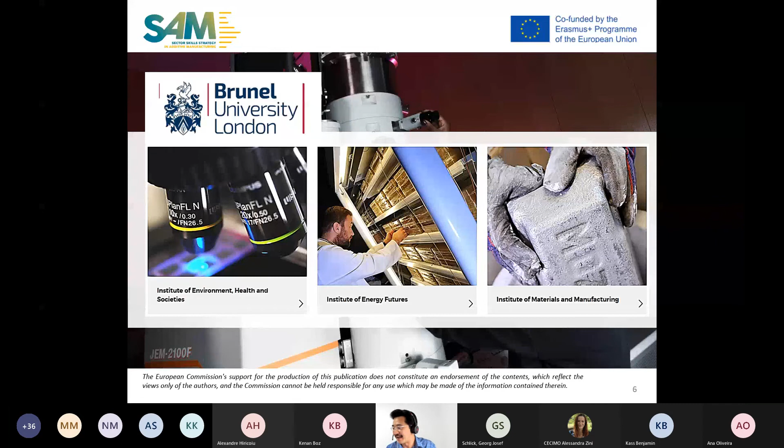We have a couple of projects in here, and there is a website link, brunel.ac.uk/research and /projects. You see the list of projects, some ongoing, some completed, some are EU projects, some national, some international, commercial, etc. So just feel free to have a look when you've got time, and very much happy to be engaged with you for those projects.

So giving you a little bit more background about myself, I've got a research focus on design for additive manufacturing, as well as on 4D printing. I know today's talk is about 3D thinking, but I've got a little bit of research also in the area of 4D printing, which is quite novel and really emerging. It takes a step further by using smart materials for 4D printing.

In my day-to-day job, I work in Brunel University as director for postgraduate research, as well as leading the product design engineering programs in the university.

I'm involved in standardization. So in terms of standardization, I'm the convener, or call it a chair, for ISO TC261 Working Group 4, which is for data and design at ISO level, as well as chair for the British Standards Institute for BSI AMT8 for additive manufacturing.

I'm also a chartered engineer and a chartered technological product designer. Also the editor-in-chief for the PIM journal, which is from Springer Nature. So that gives you a little bit background about me, about what I do at the moment.

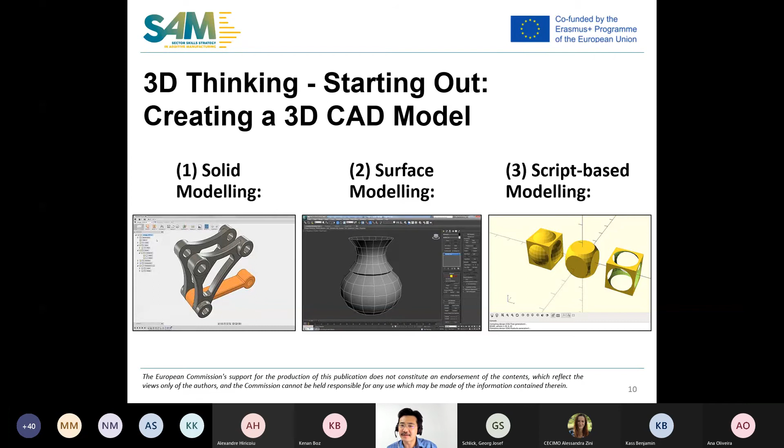Each of these obviously involves different use of software, different approaches - solid modeling approaches, surface modeling approaches where you can pinch and pull that surface, or using programming scripts for the last one. Once you have got that process, once you've got a 3D CAD model that's created, you have to save the file, which means you kick off with that digital flow, that digital chain process.

From the CAD model, you would have to slice it, to make sure that each layer being generated is also in a file format, like STL or AMF. Other file formats include 3MF, OBJ, IGES in the slicing process, where you input the machine parameters, and then you have the toolpath, which produces the G-code for the machine to read, kicking off the additive manufacturing print process.

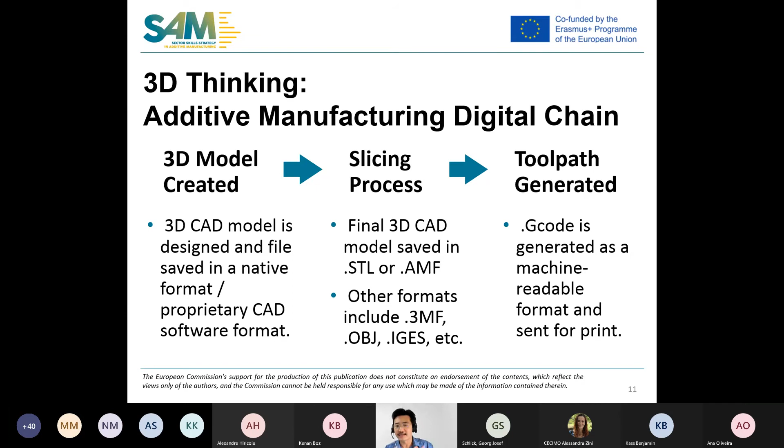So this would be the digital chain, but really the 3D model is where your 3D thinking process has a lot of a domino effect in the whole process chain. So it's very important to think about design for additive manufacturing.

We're talking about design for additive manufacturing. It's a very wide topic, and usually it's linked to the use and understanding of design rules, design methods, or tools. Tools could be software, or flowcharts and things like that, to ensure you achieve the functional performance and product considerations in terms of manufacturability, reliability, and cost using additive manufacturing processes.

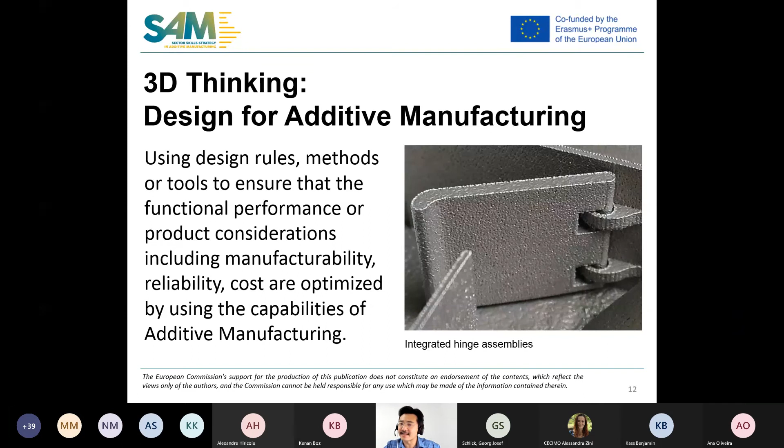You can see in this image, design for additive manufacturing could be integrated hinge assemblies. You manufacture that component in this photograph in one process. You don't have to assemble it, put it onto the production line, or get somebody to install that hinge. It's an integrated, one-stop process, which helps you take advantage of additive manufacturing.

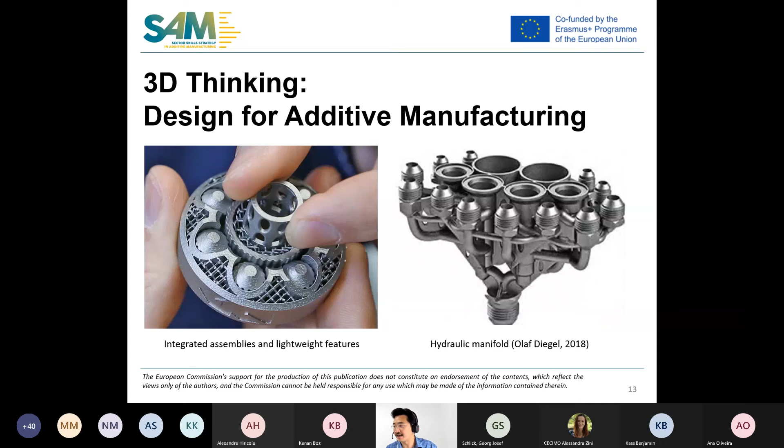Design for additive manufacturing could also take into consideration support structures, because of the interesting process where parts that are less than 45 degrees tend to drop. You need to have support mechanisms, either support structures supporting that. But if you design it so the angle is not less than 45 degrees, you may need to think about the design considerations.

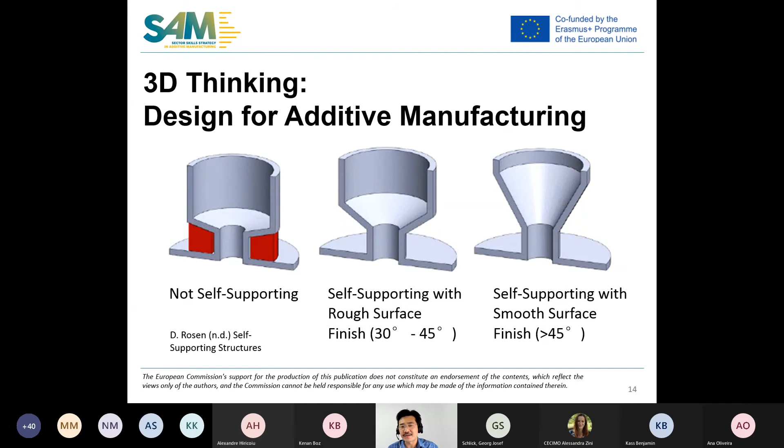So think about the angle, and that's really about design for additive manufacturing, because if the angle is lower than 45 degrees you need supports, and those supports have to be removed, which means an extra step, and that's where material is also wasted. So 3D thinking is also interestingly linked to the process itself for additive manufacturing.

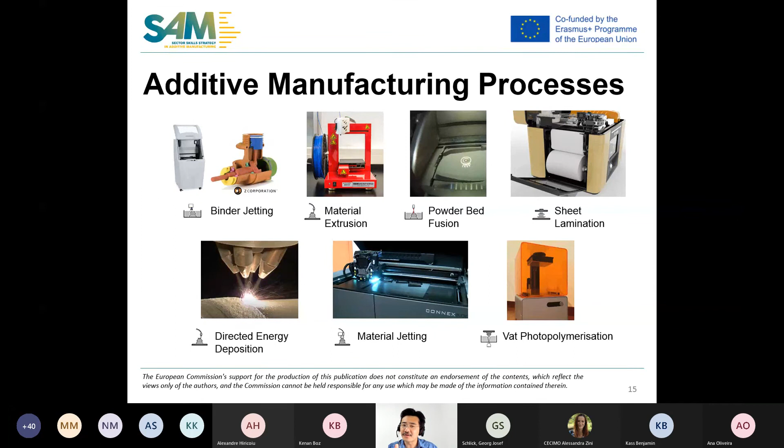We know that additive manufacturing involves 7 different types of manufacturing processes. Each may require you to think about being creative, also about the types of material being used. I've got a little bit of time with you today, so I want to go a little bit quicker, mindful of time.

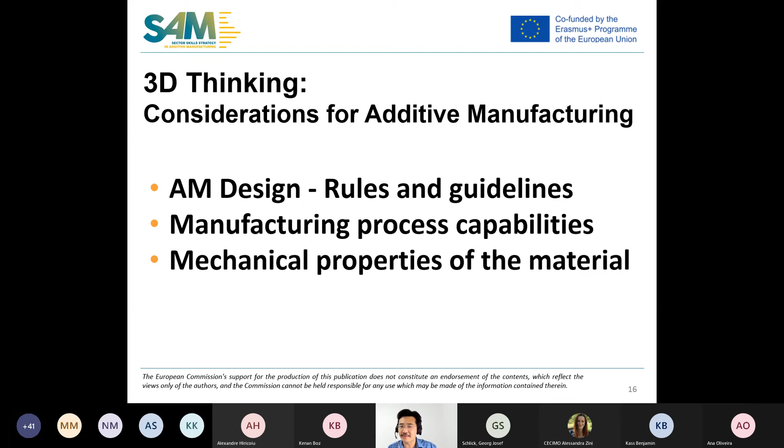In terms of 3D thinking considerations for additive manufacturing, I break it down into 3 areas: rules and guidelines for additive manufacturing, process capabilities, and the type of material choice in relation to the functional properties you need to achieve.

Let's look at the first one, design rules and guidelines. You can see that design rules and guidelines will also be linked to general rules and process-specific rules. Let's touch on that shortly.

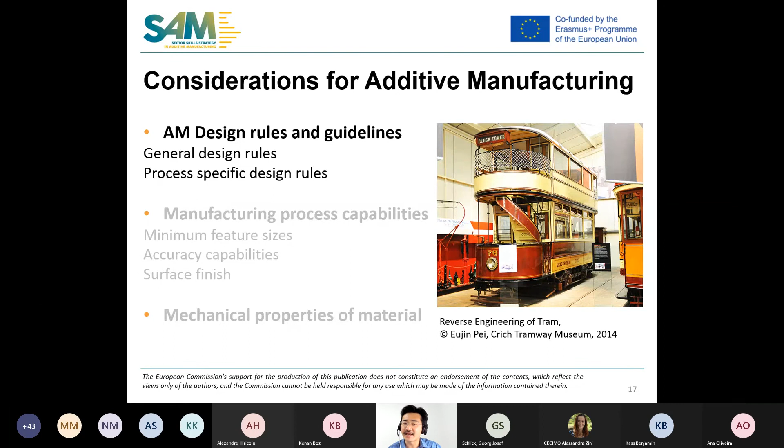To give you an example, on the right-hand side you can see this beautiful historical tram. This was a project we did together with the Crich Tramway Museum back in 2014, about 11 years ago. Back then, the tram museum wanted us to completely reverse engineer that tram because in the 1920s they only had technical blueprints. They didn't use any CAD software, and we had to reverse engineer that.

To reverse engineer an actual tram into a CAD model involves a bit of thinking, because they wanted us to actually 3D print that tram later on.

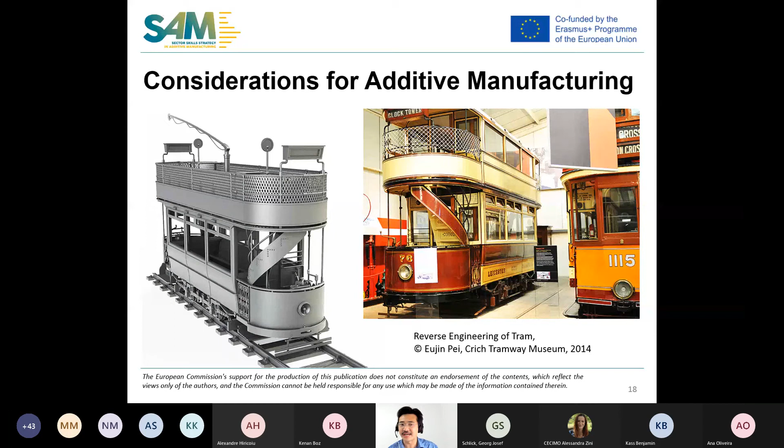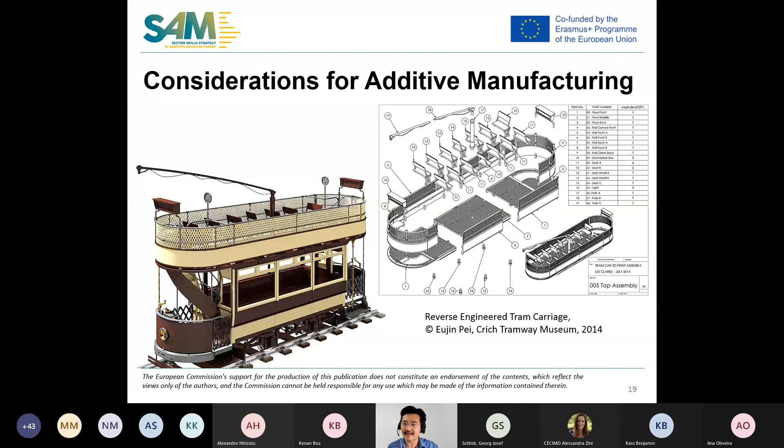So you could see on the left hand side, we've actually modeled that from scratch. We had to visit the museum multiple times, and this project took us about 2 years to complete. Later on, you realize that when it comes to additive manufacturing, you have to think about the build size of the machine. Here we used vat photopolymerization, which is SLA, and the machine was only that small, so we had to break it up into different parts and remodel it. But bearing in mind some parts will be very thin, you might have to intentionally make it thicker, otherwise it would be too fine to print. A second example is about process-specific capabilities in terms of minimum feature sizes, accuracy, and surface finish, which depend on the additive manufacturing process you're thinking about.

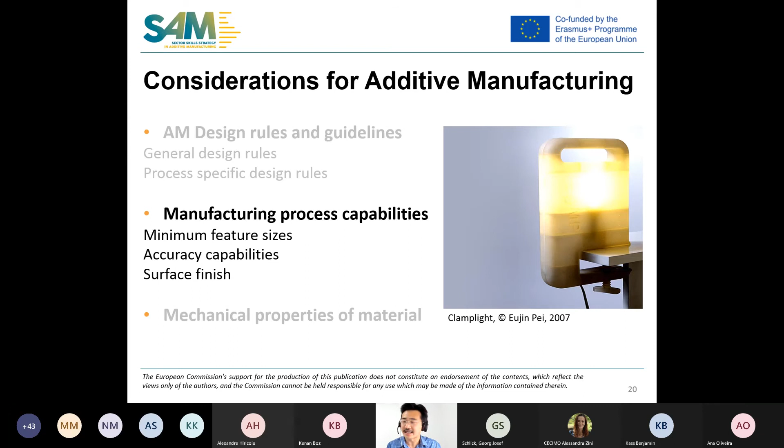Another project to share is the Clamplight, which we did in 2007. This project has different types of features. It's essentially a lamp with a clamping mechanism at the bottom for you to attach onto any work table. When we designed this Clamplight system, we only had 3 components: the main body, which has a living hinge in the center for you to fold and clip it, with snap fits as one main component; the second is the lamp itself, which is a compact fluorescent light; and the last is the clamping mechanism, the third part. So only 3 parts designed for additive manufacturing.

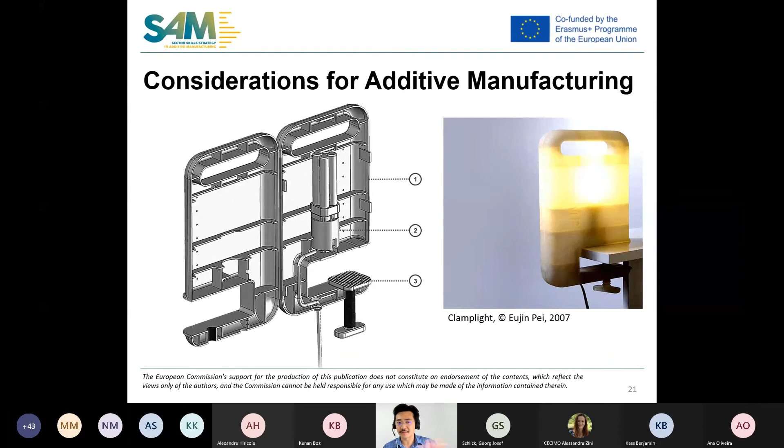But the considerations come in with the structural ribs to give it structural strength. You also need to think about the internal details, which give you the surface smoothness where the parts are manufactured from bottom up. You want the top parts, the outside, to be smooth and without removing support structures from the top, so that you get a very smooth outside surface finish.

Kenan, if I'm a little bit out of time, just let me know, but I've got a couple more slides. Okay.

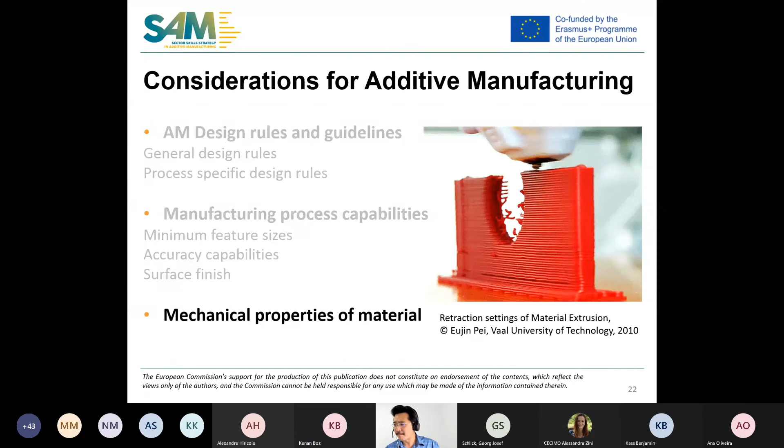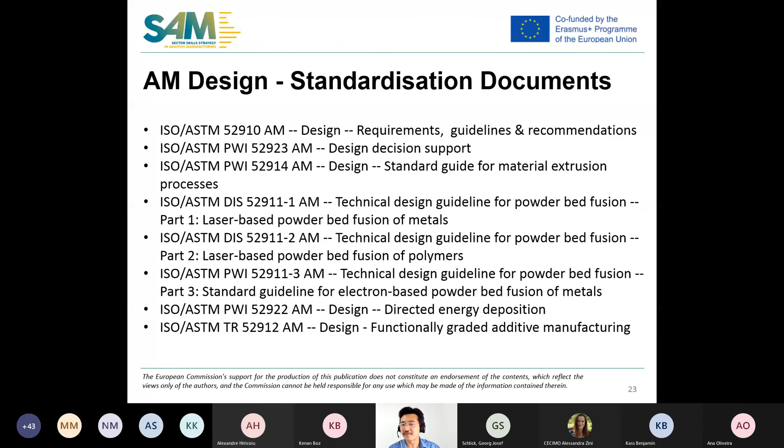It talks about design itself. You could see some of those standard documents about design decision support, design for processes, for example powder bed fusion, for material extrusion, design guidelines for directed energy deposition, for functionally graded additive manufacturing. There's a huge amount of resources out there for standards. We'll touch on just 2 very briefly.

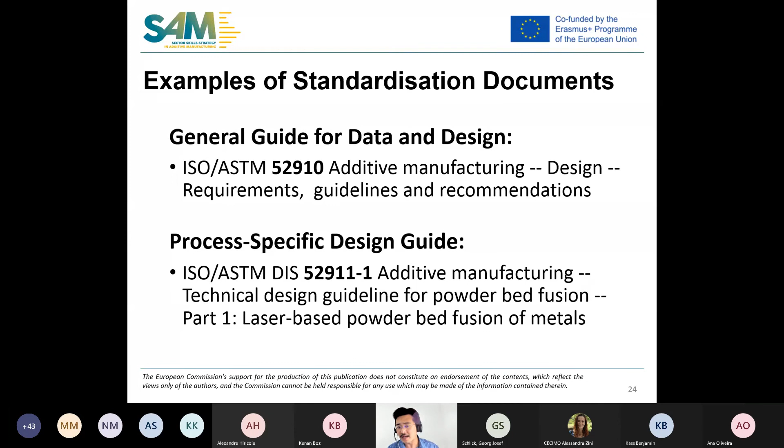The first one is about requirements, guidelines, and recommendations, 52910, and the second is specifically a process-specific design guide, 52911-1, part 1, which is for metals. There is part 2 for polymers, but we don't have time today.

Let's look at 52910, which gives you an overview, and this is a highly recommended document that takes into consideration what you have to bear in mind for additive manufacturing. It talks about specific processes and specific considerations. For example, for binder jetting, you need to think about the infiltrant to give you solidity, to make sure the powders are infused together. It also tells you about post-processing treatments, the type of binder, the powder selection. So process by process, it discusses that in 52910.

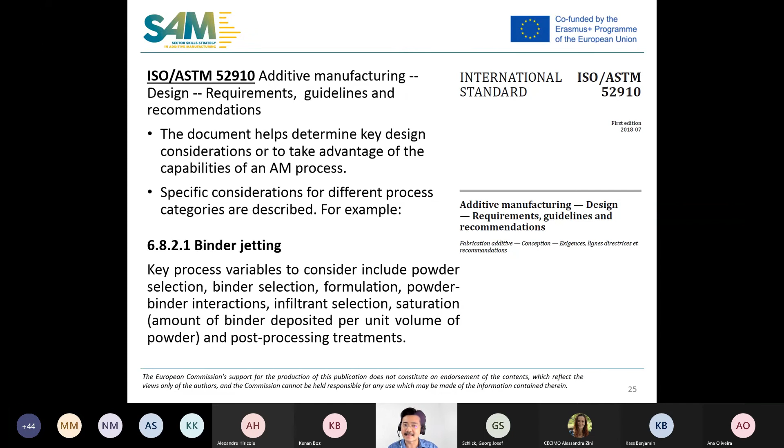It also tells you the advantages of design for additive manufacturing, such as part consolidation from 24 pieces into just one single part. For example, from Olaf Diegel's work, you can see some examples here from 52910 about multi-part mechanisms.

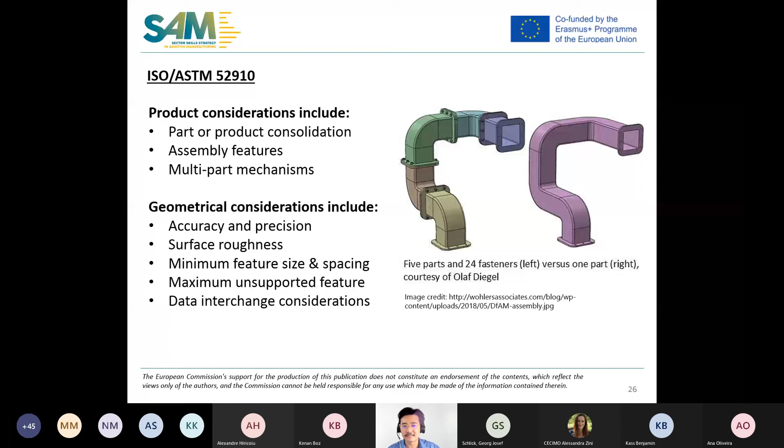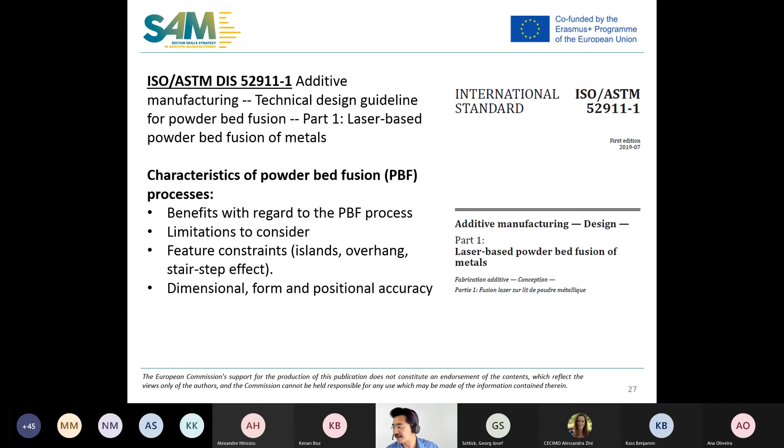And also for 52911-1, which is for laser-based powder bed fusion of metals, it talks about the process itself, the feature constraints, and other considerations. It gives you examples of what to bear in mind if you're planning to use powder bed fusion of metals, or polymers for part 2. It gives recommendations on how you can change the design.

For example, it gives a recommendation that if you have a teardrop-shaped hole, you don't need a support structure because the top part is slightly higher than 45 degrees, whereas if you have a circular feature, you probably need a support structure.

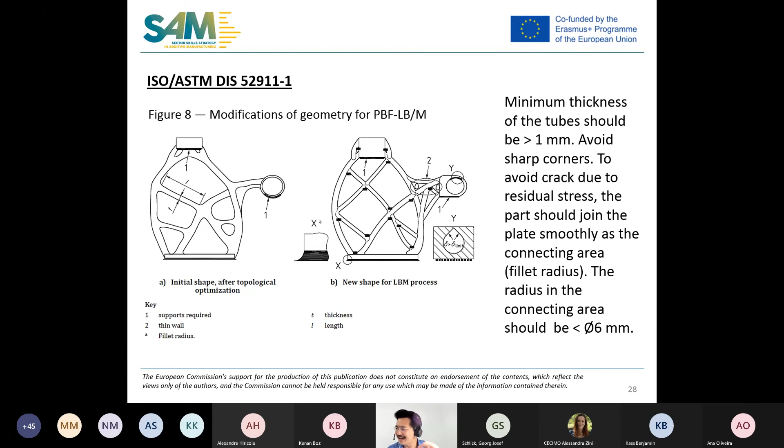But in summary, think about additive manufacturing as a way to support your 3D thinking. Think about the rules and guidelines, think about the machine process or the manufacturing process, and also consider the type of materials that you plan to use when it comes to additive manufacturing.

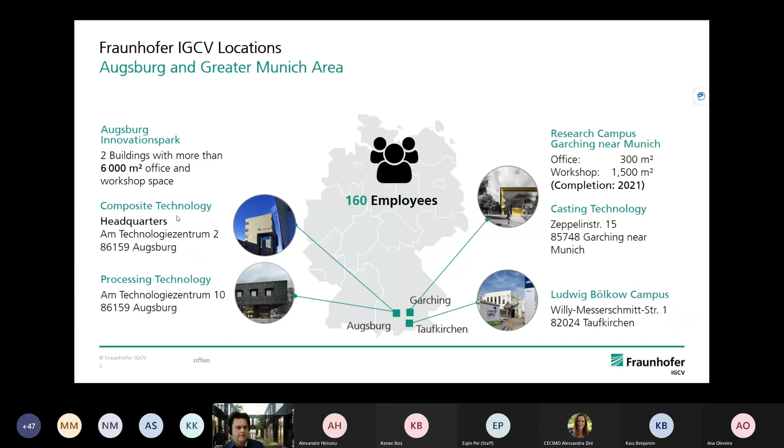So who am I? I'm working at Fraunhofer IGCV, located in southern Germany, Bavaria, in a city named Augsburg. We work in applied science on production engineering. So what is it we are doing?

We work in the areas of engineering, production, and multi-material solutions, along the whole production line. We start with materials engineering, design methods, design, processing technologies, and last but not least, we also organize plants and factory setups. That's where we put our scientific expertise.

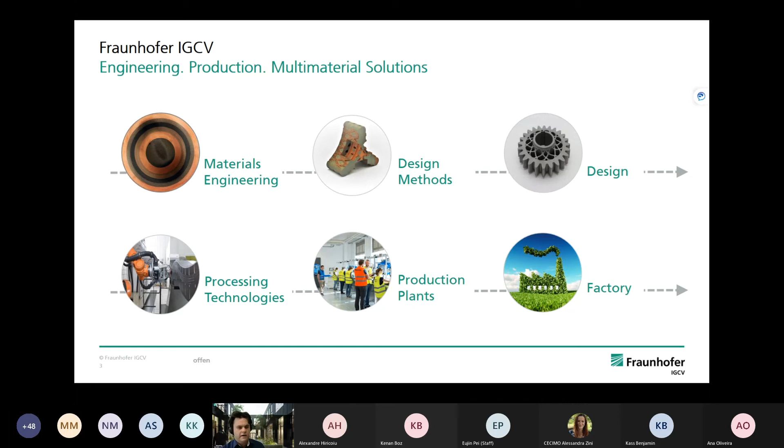In the first part—materials engineering, design methods, design and processing technologies—we're specialized in casting and composites. However, we have a very strong part also in additive manufacturing. In casting, composites, and what we call production engineering, we have three branches or departments working a lot with additive manufacturing.

This starts with additive manufacturing for sands and toolings in casting, and goes over to polymers and composites, especially reinforced composites—3D printing of reinforced composites—which is focused in the department of Professor Iman Taha.

And myself, I'm head of the department where all the metal additive manufacturing is going on at Fraunhofer IGCV. We have three research groups with 16 people all in all working on additive manufacturing of metal and metal multi-materials, combining different metals and combining metals with other materials.

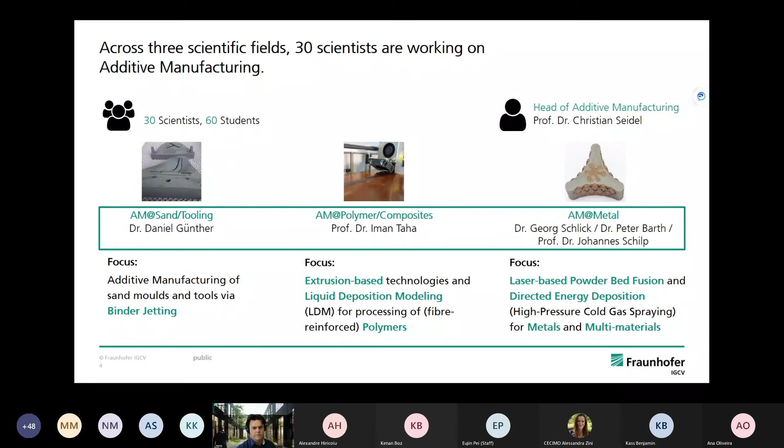So when talking about 3D thinking, I want to start with a more or less straightforward example: optimizing a hydraulic block. This is an example you'll see rather often in literature. We started with a drilled block with a lot of holes, and asked what do we do if we want to optimize a part like this?

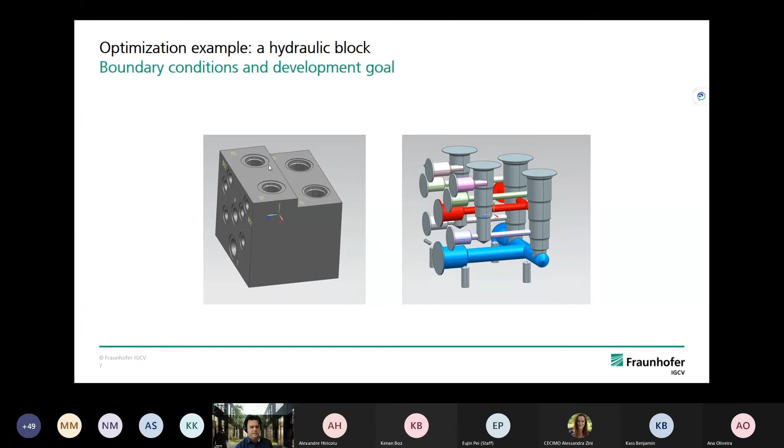We really do know the boundary conditions—where to actually place it toward the next part. So we have all the boundary conditions, and then we go through a rather straightforward optimization loop. We have the pipes, we know where all the interfaces are. We may start with an easy design, and then we need to layer the design thinking for additive manufacturing over it.

So we get something we can actually manufacture. We bring it to the machine and manufacture it. In terms of optimization, these hydraulic blocks are typically low-hanging fruit because you can always save a lot of weight, and you typically get better performance because the joints and all the pipings become much smoother—they don't have these hard cranks around the corners after designing for additive manufacturing.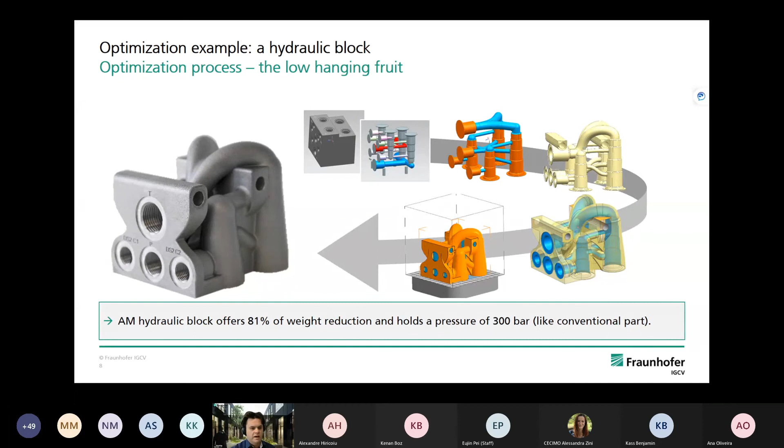But when you need to think a bit more out of the box, it's often very helpful to go along biomimicry. So I brought some analogies from nature, which I'll apply to a rather simple part in the next steps. The idea in biomimicry is always to break down the problem, to see what you actually have to optimize, which properties of the part need to be optimized. Then typically nature gives us a lot of examples where these things are already optimized.

One example is the human bone, which just grows in a way that it can bear a lot of weight and has a lot of strength. But also some algae, and especially some plants like giant water lily, stalks and grasses, and also juncus—all these plants have a certain structure within their leaves and stalks that can bear much more weight and also give some flexibility to the solution.

What I want to say is that often when we talk about optimization, we think in simulation, but for many problems this is not as easy as one would think. It can be really interesting to see what we can come up with when we do product development with these biomimicry solutions. In the next slides, I'll apply this to a rather straightforward solution.

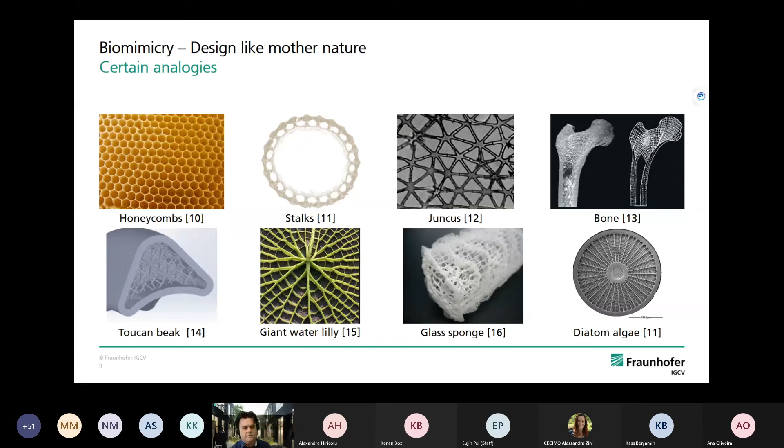However, nature also gives us the opportunity to design for much more properties than typical simulation would handle. Nature does a lot of fluid transport and strength, always combined with flexibility. We also have heat transport and cooling, and this is often not as easy as one would think to combine in one simulation. So the application I brought is actually something rather simple—a gear wheel.

Oh no, it's not that simple, but it's an example everybody knows. In gear wheels, typically there's one part not optimized at all, which is the connection between the teeth and the rod.

This is very hard to manufacture, and it is not easy to know how to place or design this part. So what have we done here? We have taken a stalk, the so-called rough horsetail, which has a certain structure to be structurally strong, and we moved this to a design for a gear wheel. Then we did a simulation for safety factors around 1, and could achieve a mass improvement of approximately 30%.

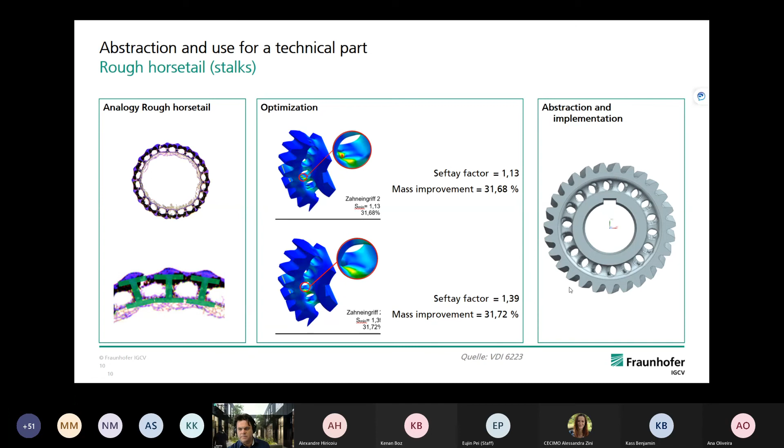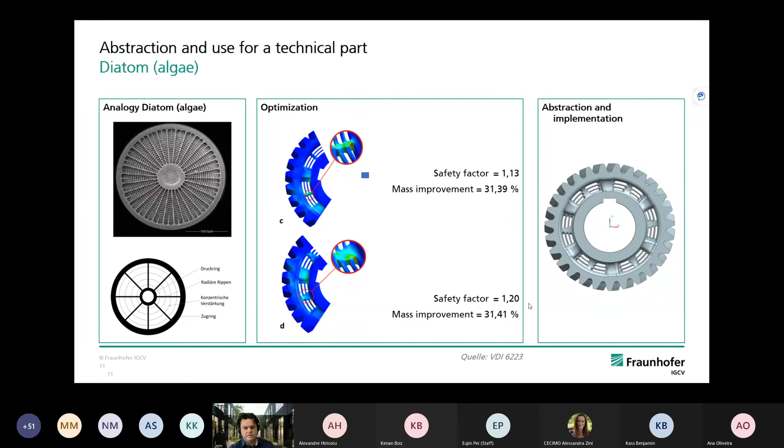Very similar in terms of what we have done, we can also use a structure coming from an algae, the diatom, and we move the same structure to the gear wheel, and we come up with very similar values. We have a safety factor of around 1, so the gear will still hold and be usable very well, as we have already tested. But we will still have mass savings of about 30%.

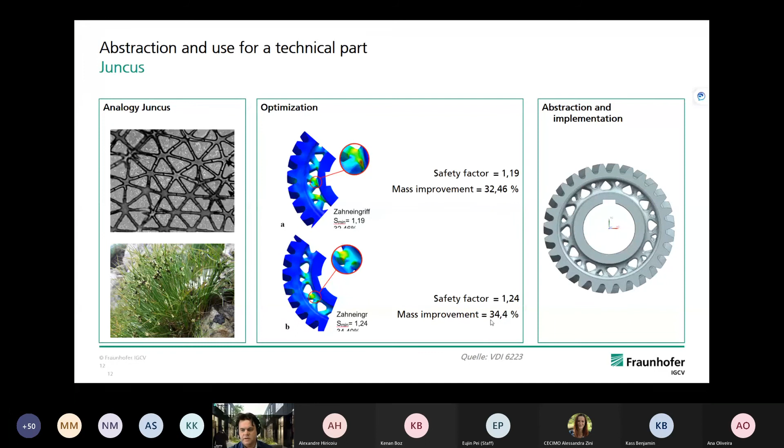And a third design we looked at is the Juncus, which is a plant, and this has a microstructure with a triangular shape. The triangular shape applied to the gear wheel looks like this, and we come up with similar values, getting more or less the highest mass improvements here.

So when we take a short look, we can actually use the analogy from biomimicry to have a major mass improvement in the gear wheel, still keeping a relevant safety factor, and also keeping the displacement in range. This could be the second optimization factor, because this would actually leave us choosing the rough horsetail, which has the lowest displacement for this specific optimization, or we could go for the Juncus, which has the largest mass improvement with similar boundary conditions.

Now, this is an example where we could actually move to a very certain lightweight design using additive manufacturing and 3D thinking. What I've not shown here, but what we could also show in the lab, is that we are getting very close to regular simulation optimization by this manual approach in this case. So this can be a way to actually think in 3D and open the mind, go out of the box for 3D thinking, getting ideas from biomimicry.

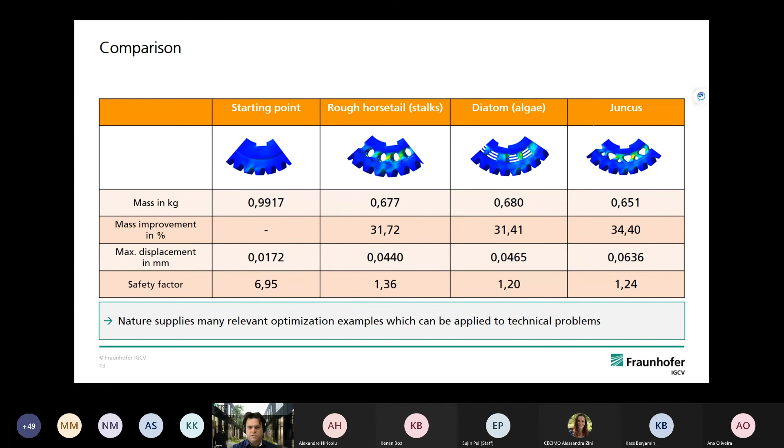Now I kind of want to jump to things that we are working a lot with, because here we see that this can open a vast new way, or vast new opportunities, for 3D additive manufacturing and also 3D thinking. Next step in design freedom from our point of view, or actually research ongoing in this area, is 3D multi-material processing. That's one of my own major research topics.

As you may know, with additive manufacturing it's rather easy to combine two materials in a discrete material transition, especially in one direction. However, what we're achieving, or what the actual research goals are going towards, are continuous material transitions on one hand side, but also 3D multi-material applications in the end.

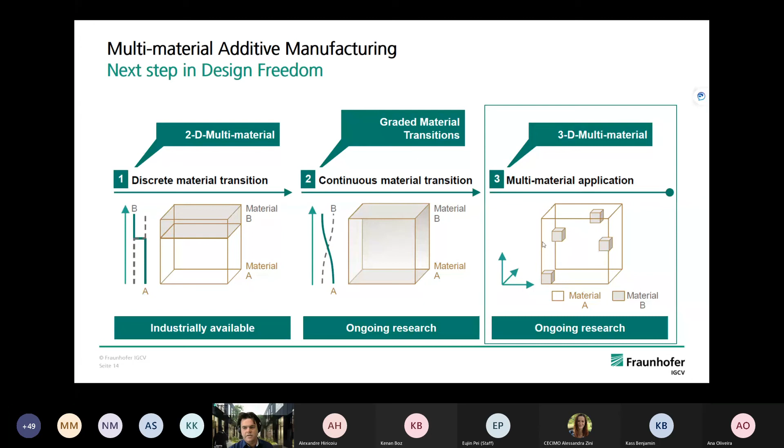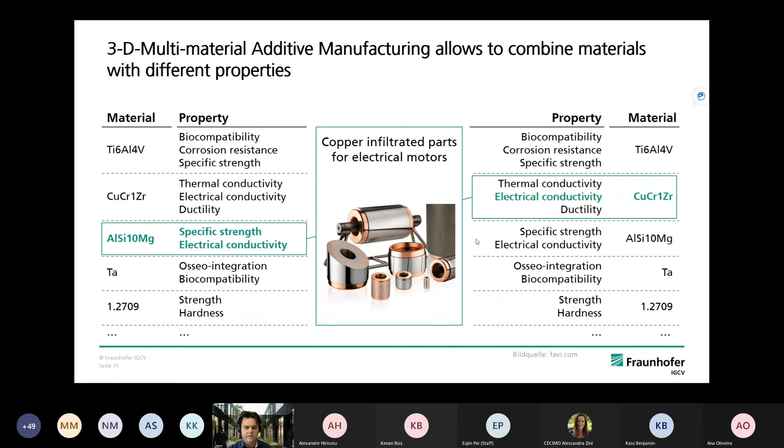And for that, I brought 3 ideas that come from actual industry nowadays, where we have a combination of different materials. This is especially in e-mobility and for electrical motors, where one tries to combine specific strength with high electrical conductivity. This is a conventionally manufactured part from aluminum with copper alloy. However, if we could go towards additive manufacturing, design possibilities will increase much more.

Or let's say a similar idea would be dental implants, where we would like to combine specific strength and biocompatibility with very good osseointegration. So we combine titanium alloy with tantalum, also combining a very good flexible E-modulus, or Young's modulus of tantalum with a very strong titanium.

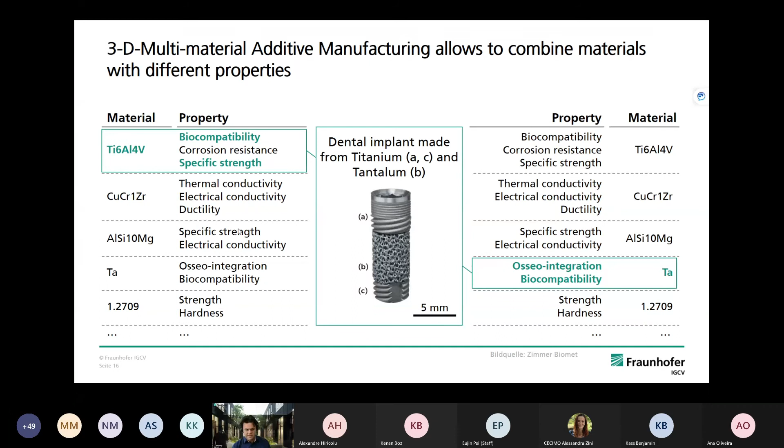And the third part, actually coming from our lab, is where we are going towards die casting tools, where the plan is to increase thermal conductivity without always using, or without losing too much material for cooling channels, and combine this with high strength, high hardness material, in this case a tool steel, to actually also improve functionality in this area.

So in the end, what I try to show you is, on the one hand side, that 3D thinking can be an interesting process, and it is a process that can actually be supported by biomimicry, by looking into nature. On the other hand, we are also technologically going towards one thing that nature does as well: it combines multiple materials in one part, or in one creature, so to say. But for the process of 3D thinking, multi-material processing will actually make these things even more demanding to get the very much optimized part, and to get everything out of your design.

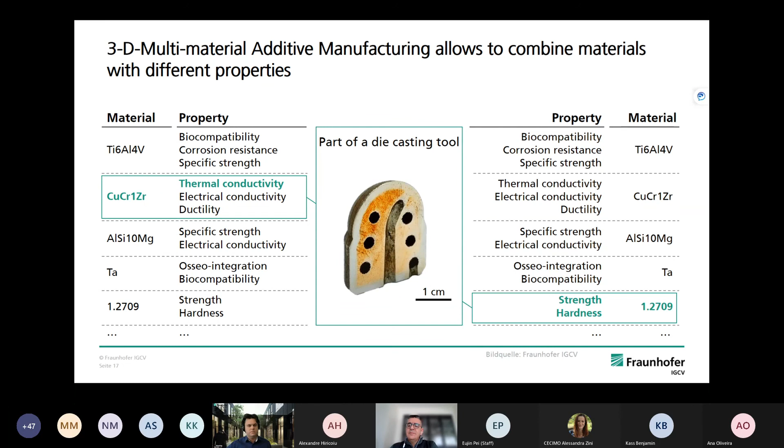Yes, I do think so. When thinking about larger structures especially, this is also an opportunity one could use, or a possible way to achieve similar parts.

Okay, thank you. So the next question is from Daniel. You spoke about the benefits of multi-material printing. Are there any commercially available systems for multi-material printing? Is it available on the market to buy a multi-material printing machine?

Actually, it's becoming available, that's what I would say. Some additive manufacturing equipment manufacturers are offering multi-material processes on a rather experimental basis. However, you can buy one machine by Aconity together with Aerosint, which would be powder bed fusion with two materials. So it's becoming available, that would be the answer I would like to give here.

Okay, thank you. Next question is from Alirza. What is your idea about reducing the residual stress in multi-material 3D printing?

I would say that's not addressed that well yet. We haven't had too much problems with residual stress in multi-material processing compared to residual stresses in monomaterial processing. So the thing will still be doing the right thermal treatment after the process, which is actually a research topic on its own.

Good morning, everyone. Again, thank you to the whole SAM organization for giving me the opportunity to present during this event. The main topic I will try to cover is design for additive manufacturing, highlighting the main challenges, critical skills, and the most efficient training methods we can adopt in order to make the technology more available for the market and the industry.

In today's presentation, I will cover 4 points, starting with a quick introduction to additive manufacturing, where I will highlight the biggest challenges one may face when starting. Then, what skills are required to overcome those hurdles, and how simulation can help 3D thinking through generative design or topology optimization, as well as modeling the process itself to understand better what's going on inside the printing machine.

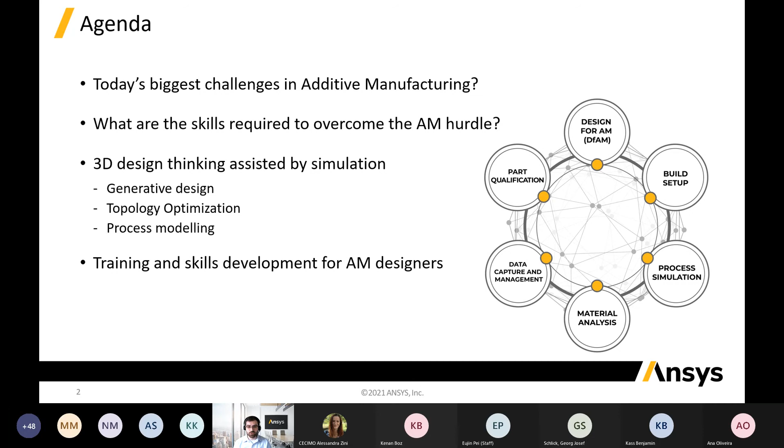Last but not least, I will end my presentation by providing some guidelines for training and skill development for people who are just starting with additive manufacturing and would like to ramp up their knowledge about the technology.

As a short introduction, I think most people on this call are very familiar with additive manufacturing, and the two previous speakers gave a good overview of it. I'd like to remind that additive manufacturing is put in opposition with more traditional subtractive manufacturing techniques. As Dr. Pei said in the first presentation, one of the main goals for additive manufacturing would be to provide designers the freedom of shape they want when creating new products, but also it aims to reduce waste during the production phase.

And this has to be taken into consideration already from the design point, because if you are not careful about your design, then you end up generating supports and rubbish material that will not lead to this reduction of waste material that is in opposition with the subtractive manufacturing.

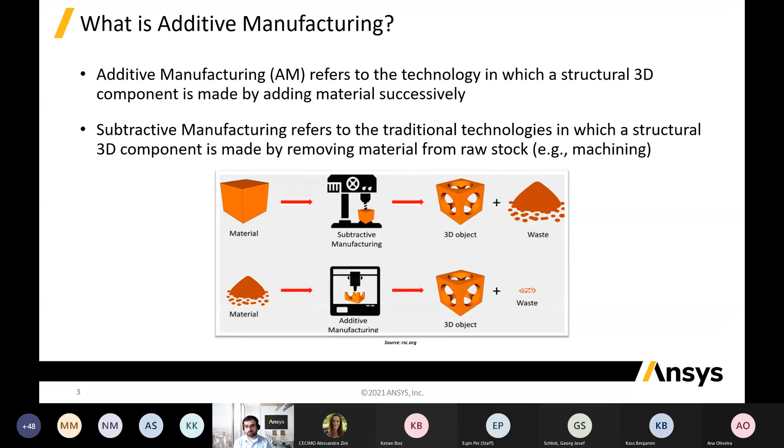In today's presentation, I will mainly focus on the metal part of additive manufacturing. The reason is that you can make the most of simulation for metals. You will face much more painful, bad experiences with metal printers if your printing fails than with polymers, which are, I would say, cheaper to work with.

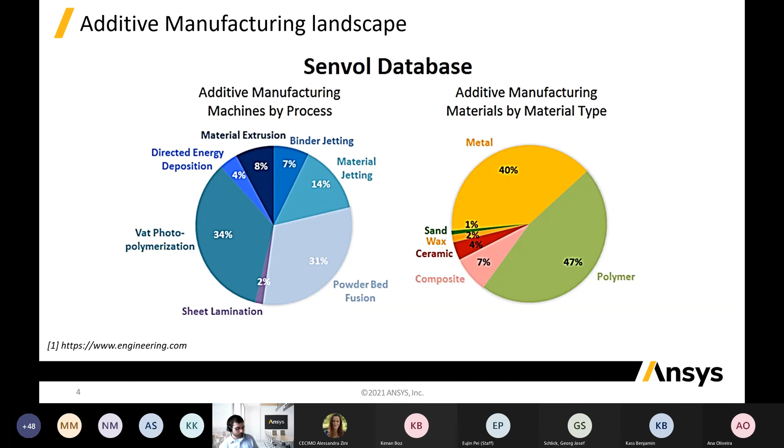As some typical application cases, first we have prototyping, which is well suited for additive manufacturing. When you're starting to produce a new design or new concept, you'd like to test it without creating all the serial production tools required for the later stage. So you can quickly evaluate different designs, test them, and see if they make sense through additive manufacturing technology.

The second application that we see as a big trend in the industry is tooling. So instead of producing your part, you create through additive manufacturing the tools required to produce your parts. I'm thinking about molds for injection, pressure injection, casting, and other hot forming tools. One of the key advantages is the freedom of shape that helps you design, for example, cooling channels to have conformal cooling all over your part.

So through additive manufacturing, you bring in very specific optimization of your part, providing added value to traditional parts compared to before using additive manufacturing. Last but not least is serial production of parts with very high value added, for example lightweight or bionic shapes that could not be produced any other way except by additive manufacturing.

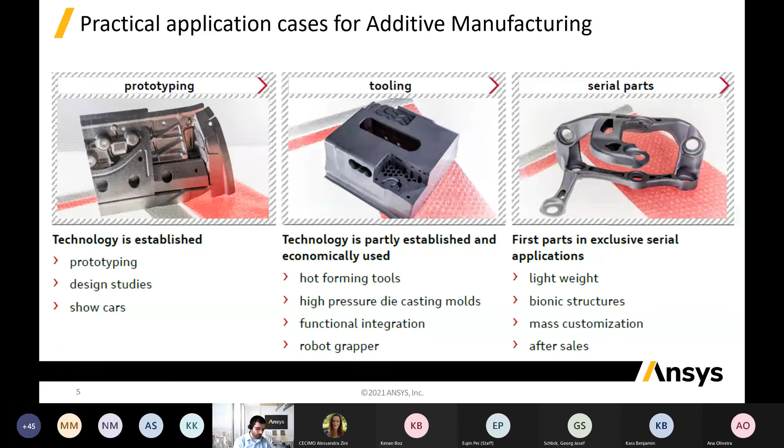Those advantages, I would say, are counterbalanced by some very big challenges that one needs to overcome when starting with additive manufacturing. The first of those challenges is related to the technology itself.

When you try to adopt additive manufacturing, you often see problems with the material. You need to evaluate your machine and set it up so it produces very good material with low porosity, in alignment with the regulations in your industry, for example aeronautics or any other sector.

Of course, you also need to think about the process implementation of additive manufacturing inside a company. If you buy a printer, you need to dedicate a room to it, and set everything up so your powder doesn't get contaminated with external material, and your people don't get contaminated with powder, because hygiene and safety are very important in this field.

Then, of course, there is the post-processing that is often required. It could be heat treatment, support removal, surface finishing, etc. And there is the control and certification of your components once they are printed.

Another big challenge is the shortage and lack of regulation or standardization for additive manufacturing technology. I'm thinking about all the different software out there that cannot exchange data, and the printers themselves. Each one uses a dedicated format, and you cannot take a file from one machine to another machine from a different provider. This makes adoption harder, because if you're already equipped with some software, you cannot simply switch from one company to another, or from one type of technology to another.

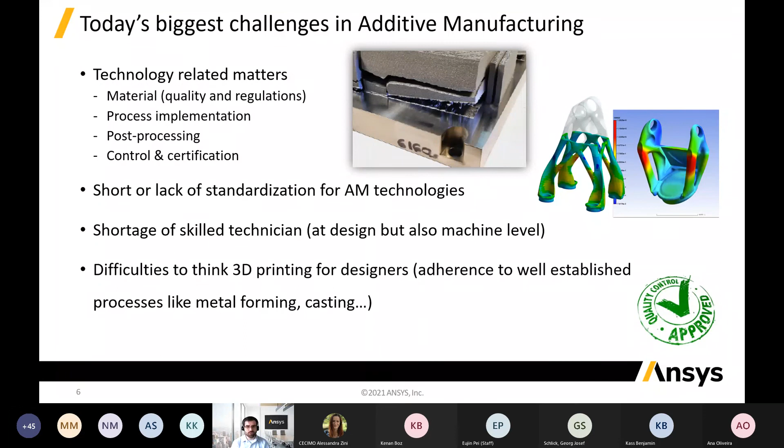So those are, I would say, some of the biggest challenges for the industry itself. I think if you're starting with a new technology, you're quite familiar with this representation.

Additive manufacturing also complies with this. So what will happen is at the beginning, when you buy a printer or when you start with a printer, you will have very low maturity with this technology, but your expectations are going to grow every day, and those expectations are going to reach a peak when you start having your first failures, or multiple failures. Then you are going to lower your expectations, but through this failing phase you are going to gain experience and maturity, and eventually, if you don't stop there, after a while you will reach the plateau level that will allow your productivity, and you will have fewer failures, and produce more components that are efficient for the market.

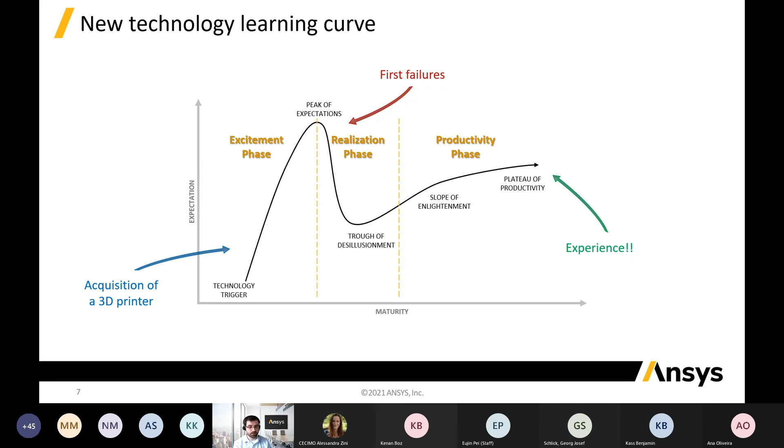To do this, the skills required for designers, they are, of course, I'm not breaking any ground here. If you want to be a good designer for additive manufacturing, the first skill you will need is a good knowledge of the CAD softwares that are out there on the market, right?

Then you also need a very open mind to innovation and design for additive manufacturing. There are rules and you need to accept them. I think Dr. Pei at the beginning really highlighted some standards and guidelines that are set for additive manufacturing. You really need to accept those and move forward with this technology. Then you need a very good understanding of the post-processing required once a part is finished, because this way you can take this into consideration already from your design, and very good knowledge of the materials themselves, how those materials can be produced, and how material tuning could affect the mechanical behavior of your components.

The part on demand, for example, will require very good strength in reverse engineering skills. This is the ability to clearly identify from your traditional products which are suited and well fitted for additive manufacturing, and which should remain in the traditional production line, because not all parts are made for additive manufacturing. Again, additive manufacturing, I don't think it's going to replace all the traditional manufacturing processes in the world.

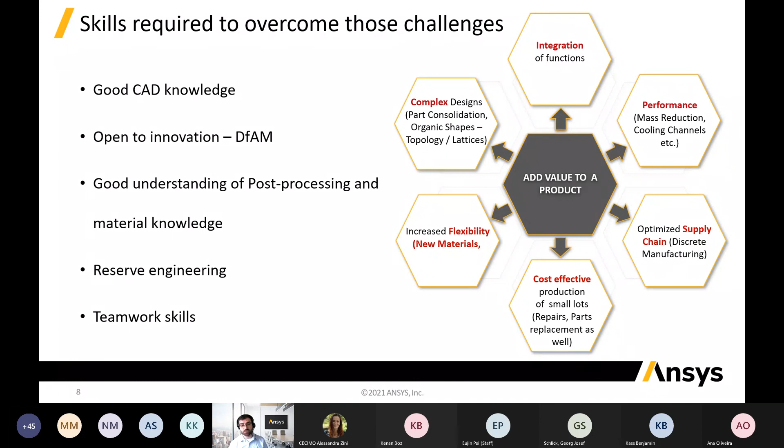With that being said, I would like to give you an example of very successful additive manufacturing that we did with one of our customers. This really addressed the reverse engineering part, analyzing which products are well suited for additive manufacturing in terms of efficiency as well as cost reduction. This was one of our American customers. They produce antenna components for satellites, and they had an antenna made of over 100 different parts, and they thought, why not use additive manufacturing and combine all the parts together into one single piece? By doing so, they reduced the cost of development and production for those components by about 75%.

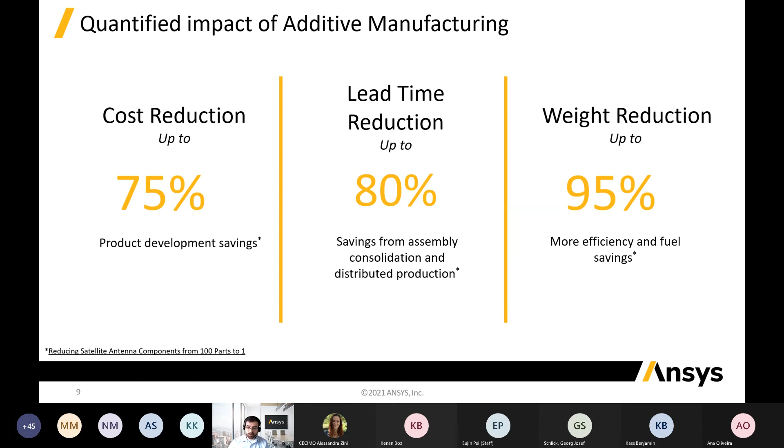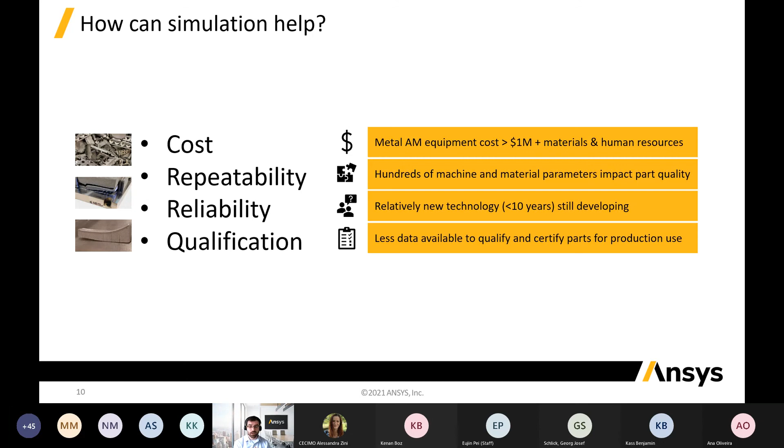And in all of this, how can simulation help you? Well, simulation is there to assist you to understand your design, to help you clearly bring your cost down by not producing parts that will break during the fabrication process, as well as increasing repeatability and reliability. And reliability is here a key factor that can really be evaluated through simulation.

This is, I would say, a chart that will provide some kind of guideline to virtual modeling. Of course, at the beginning, based on some experimental evaluation, you are going to calibrate your model. You are going to put different physics inside your model and different parameters, and you are going to do it as long as your simulation does not fit the experimental data. Once you get a very good fit between the simulation and the data, then you move to the second stage, which is understanding your design.

And in there, you're going to run some DOE to see among the different physics you input inside your model, which ones are dominating the efficiency behavior of your part. Once you identify those key parameters, then you're going to move to design optimization or improvement by changing those parameters, looking for, for example, using gradient methods, looking for a global optimal functional point of your design.

Once you're done, you need to move to the last and most important stage, the robustness analysis. For example, if you use topology optimization to get a very good design, if you don't plan for all the load case scenarios, your design might just break during the testing phase. This is the role of robustness analysis, to make sure your design will stand the life cycle no matter what.

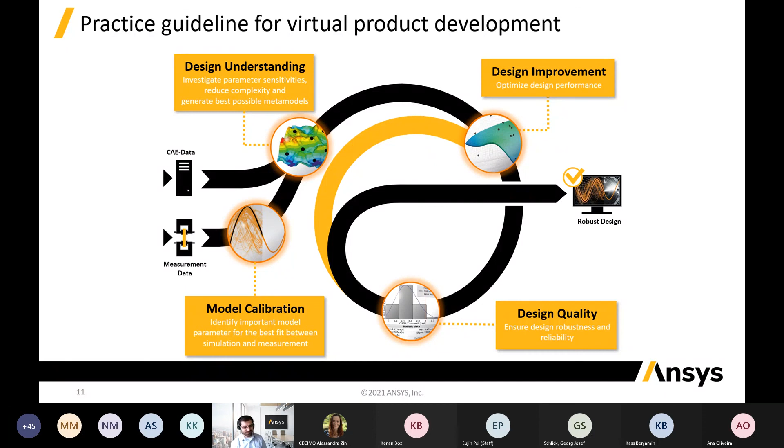This leads me to talk about what is now very famous on the market of optimization, also called generative design, or as we prefer to call it, design exploration. This is a bit different from topology optimization, because generative design is, I think, a visual support for designers to help them understand how input parameters could affect their design.

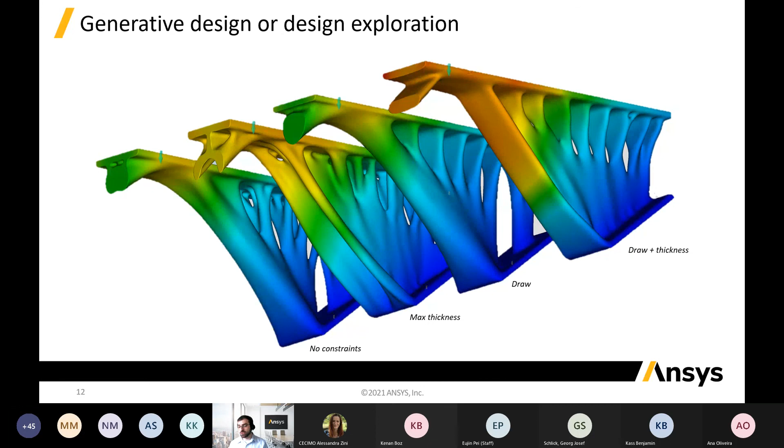In this case, we have a simple geometry, and we run some kind of optimization over it, asking the software what happens if I set, for example, a constraint of max thickness for my design, and we see how this can change your original optimal form. What happens if instead of using this part for additive manufacturing, I want to do some kind of metal forming, so I would like a pull-out direction, and we see the third kind of design. This is what we call design exploration, enabling designers through simulation to quickly assess how their design will behave under specific rules, whether constraints on the fabrication process itself or constraints and loads over the part or design space they are going to create.

The main role of topology optimization is to link the products, the people, and the process together. First, topology optimization will enable different kinds of people, FE simulation experts or designers, to really understand the behavior of that design, and then it will help them improve already existing components, or create designs for new types of processes.

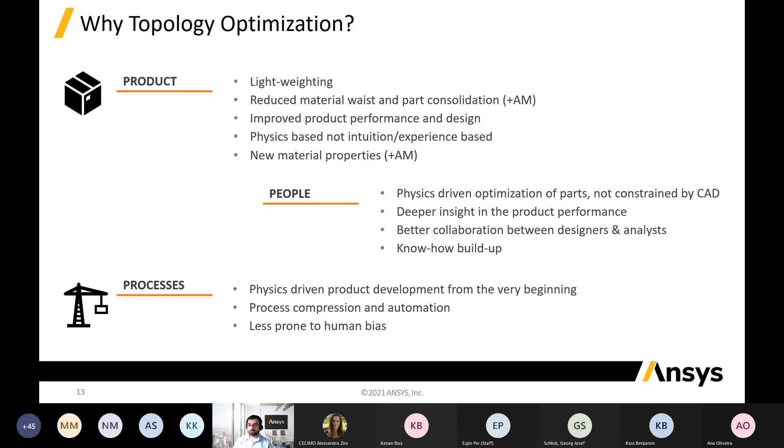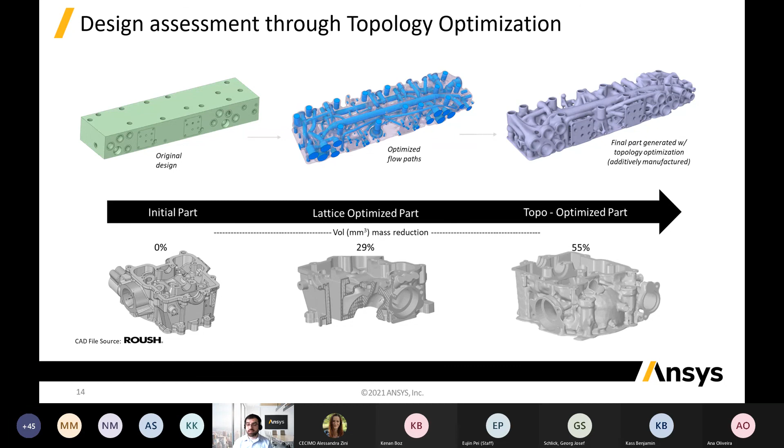With that, you have one of the most famous simulation-aided design tools, called Topology Optimization. In Topology Optimization, you often start from a block, and you ask the algorithm to optimize the part given, for example, the highest strength, or using lattices to design local mechanical properties, which will be a kind of local material tuning, in order to enhance the part's capabilities as well as reducing the weight of those components.

Last but not least is the simulation of the process itself, to really understand how your part will behave once inside the printer. At this point, I need to make clear that no matter what you do before in the design, no matter what rules you apply, you will still have problems once you go inside the printer.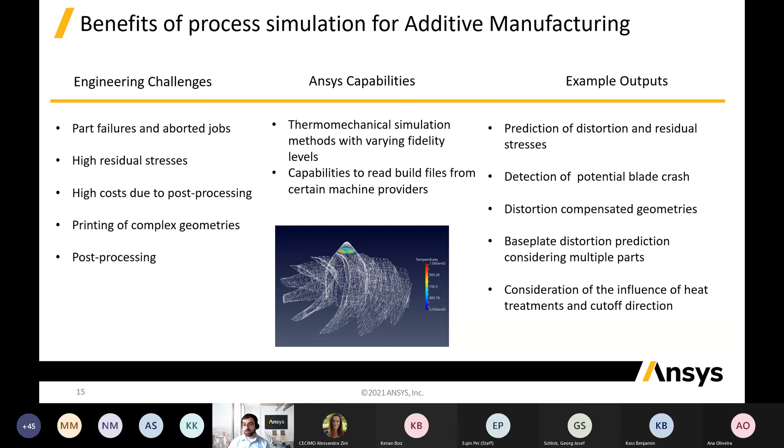With that being said, I'd like to highlight the Ansys solutions for additive manufacturing. Of course, we have tools for the design part, like topology optimization tools or design exploration tools. But we also have the full chain to help people understand how their part will behave inside the machine, and how to finely tune the machine parameters to achieve good material properties, in terms of porosity reduction and microstructural enhancements.

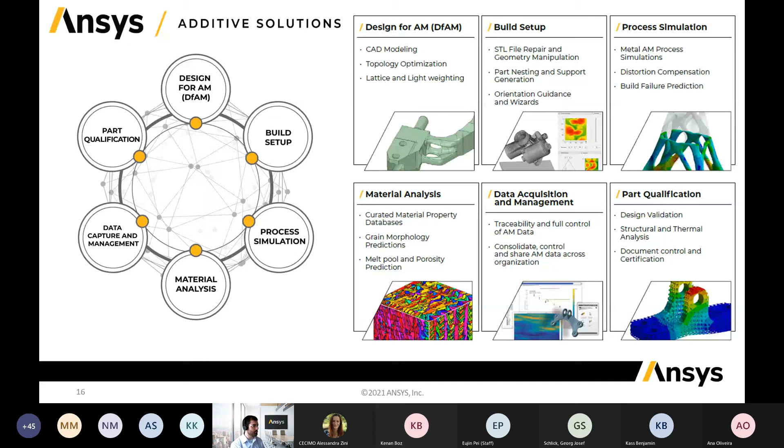Before finishing, I'd like to take you through the last point, training and skill development. There are different methods out there, and I would recommend two of them. The first are specialized institutes offering hands-on classes that help you understand the theory of it, and also give you practical application by allowing you to print your components. Of course, you will be assisted.

I attended one of these classes 2 years ago at the Fraunhofer in Hanover, the Centrum Laser. It's very good for designers, because on the last day you take your component out of the machine and you're asked to remove the part from the base plate, cutting all the supports, and you see how difficult this process is. Later, when designing for additive manufacturing, you think about those challenges.

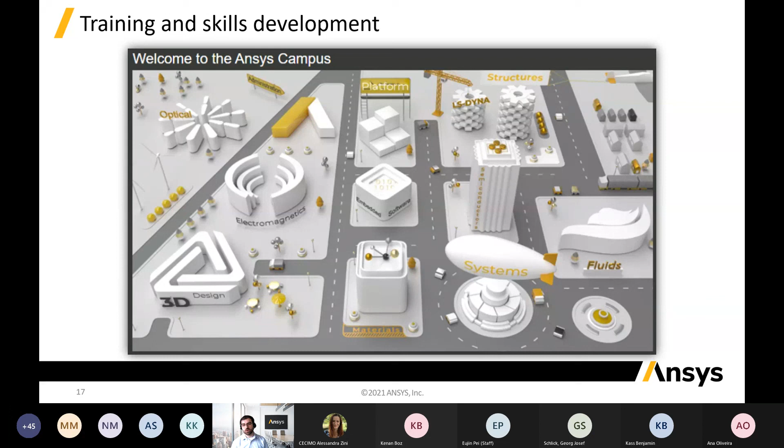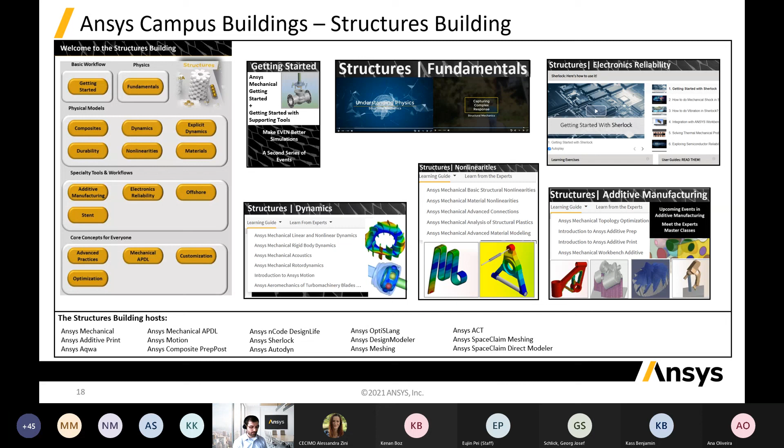The second method is e-learning. Ansys has an entire campus dedicated to e-learning, with one building specifically for structural engineering, and within it a room for additive manufacturing. There you learn basic topology optimization skills as well as process simulation, and you can interact with our experts and take part in challenges or online classes set on the e-learning hub.

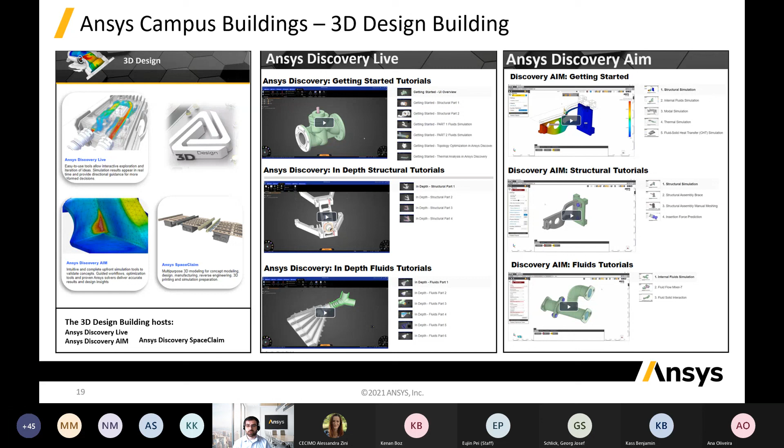The same stands for the design building, where through our GPU-based tool you can explore designs in a couple of seconds. It's a great tool for designers who don't want to go too deep into finite element modeling, but still want to run simulations through the Discovery products.

Before finishing, I'd like to highlight the Ansys World Conference being held in April this year. You can register for free and attend keynote speeches about simulation for all industries and the most relevant challenges we face today.